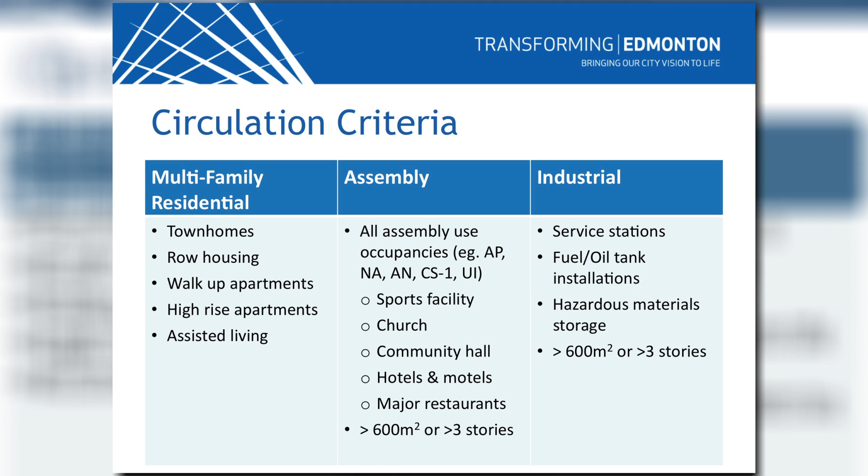As far as assemblies, we will look at normally any major assemblies, sports, church, community halls, hotels, motels, restaurants, or anything over a large size, over 600 meters squared as required by the building code. For industrial facilities, service stations, bulk fuel stations, hazardous materials, or again, anything over 600 meters squared, are some of the type of facilities that is circulated to fire rescue.

Initially, our first comment is to ensure our emergency response and public safety are maintained. We want to make sure that we can get to the facility and that the public is safe, the occupants are safe, and the neighborhood is safe from the proposed development.

Two things we look at are ensuring access to the property, access for emergency services, the public, and a high level of safety for the firefighters. Again, two principal components: emergency access route design and functional water supply. We need utilities to the site, primarily operational water supply to the building.

When our fire prevention officer reviews this submission, we will respond back to the applicant in two forms. One with a condition, and a condition is something that we would require a response to prior to offering support for the proposal. The second one is an advisement.

An advisement is basically information from fire rescue that we do not require response on. It's for additional information for future use or for information that you're going to require prior to your building permit or occupancy of the building.

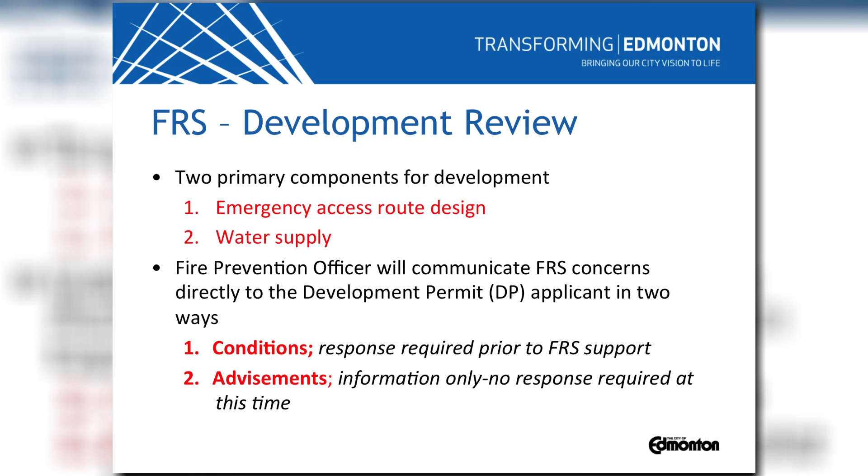When we review fire access routes, we're reviewing the requirements out of the Alberta Building Code 3.2.5.6 and, more importantly, the appendix from that section. Some of the things we look at are the turning facilities. So when we measure from the public thoroughfare to the principal entrance of the building, we're looking at the distance.

If that distance is greater than 90 meters, we would require a turnaround. If the distance is greater than 120 meters, we require a second access to the property. The secondary access should be constructed of a minimum construction of a 3-meter wide concrete path, 6-meter right-of-way.

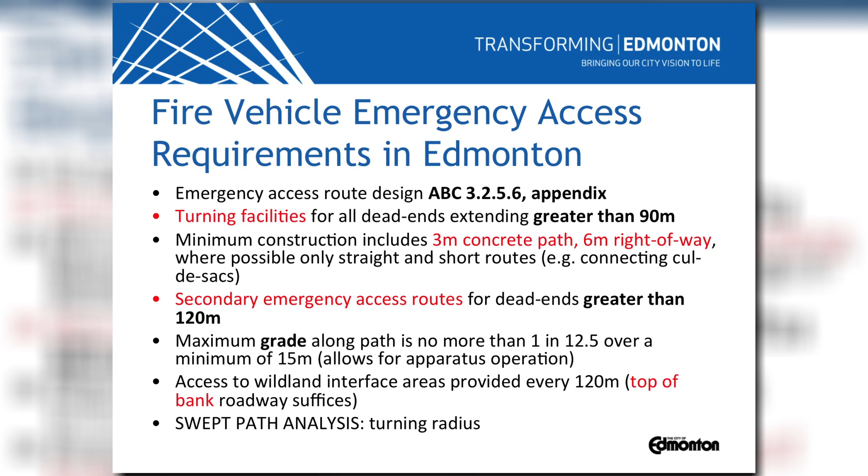3-meter wide concrete path for the wheels of our vehicle to negotiate the access, 6-meter wide for accessibility for us to set up and stage to put out outriggers if necessary for access to a property. The last thing, and probably most important, is the swept path analysis or the turning radius, which we'll discuss further.

The swept path analysis, and if we refer back to 3.2.5.6.1 in the appendix of the building code, it talks about consulting the local fire authority. If you build an access road to 3.2.5.6 with 6-meter wide roads, 12-meter centerline turning radius, etc., that doesn't necessarily mean that a fire or emergency vehicle can access that roadway.

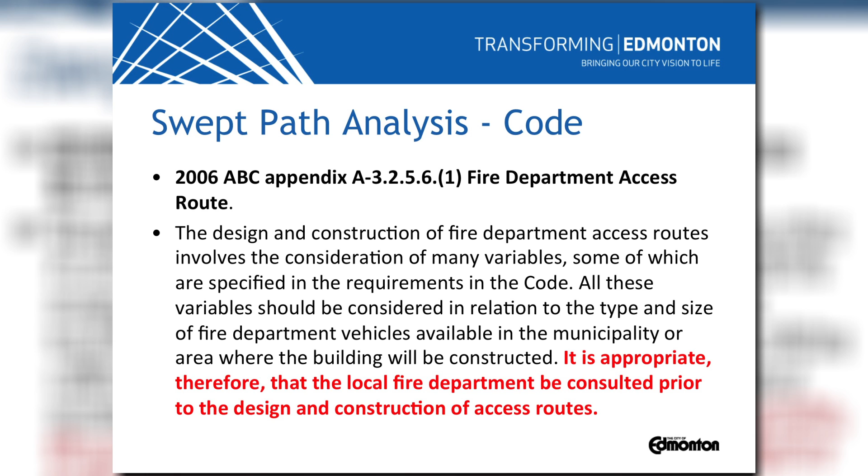In the appendix, it states to consult the local fire authority prior to the design and construction of the access route. What we're finding is that in Edmonton, with the size of our vehicles, quite often the minimum requirements in the code do not allow for access to properties.

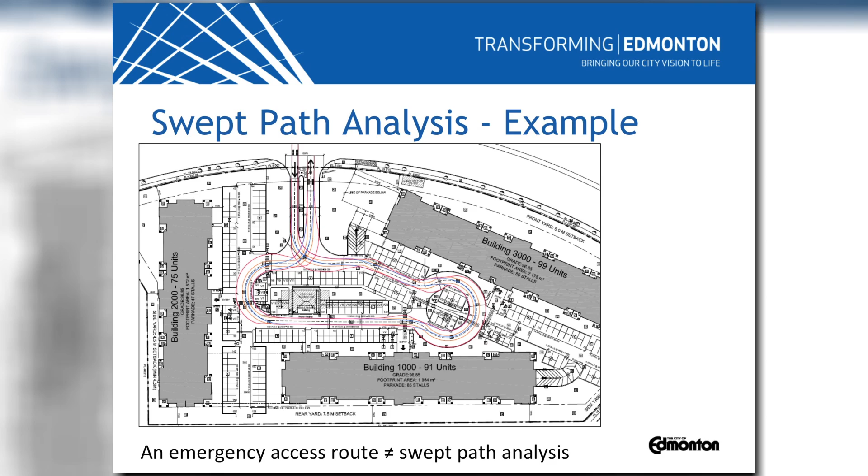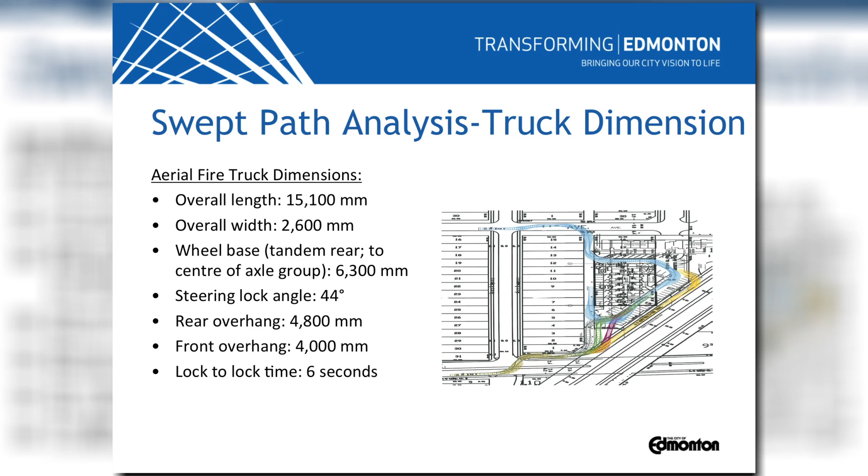When we talk about water supply, the fire code has a STANDATA issued in 2009 that talks specifically about water supplies and access and how the two intermingle and how they provide the necessary components to respond to an emergency in a property. It talks about having the water supply dealt with at the development stage in consultation with other city departments prior to the subdivision approval, and ensuring that not just proposed water supply, but that the water supply is operational and sufficient for firefighting operations.

This STANDATA and all the STANDATAs I refer to are available through Alberta Municipal Affairs. You can Google fire code STANDATAs. In addition to the water supply, Article 5.6.1.4, Access for Firefighting, sets out specific conditions for a fire department's ability to ensure firefighting crews, equipment, apparatus can reach a construction or demolition site to effectively control fire.

So what we're talking about is that we review the design of your access road, the water supply, but it's important to understand that for fire, we require this for construction. So if you need to reference the Fire Code 5.6.1.4, that further explains the requirement during construction rather than just at the end stage. When we apply the fire code in reference to construction sites, it will include single-family residence, multifamily, commercial, any type of occupancy.

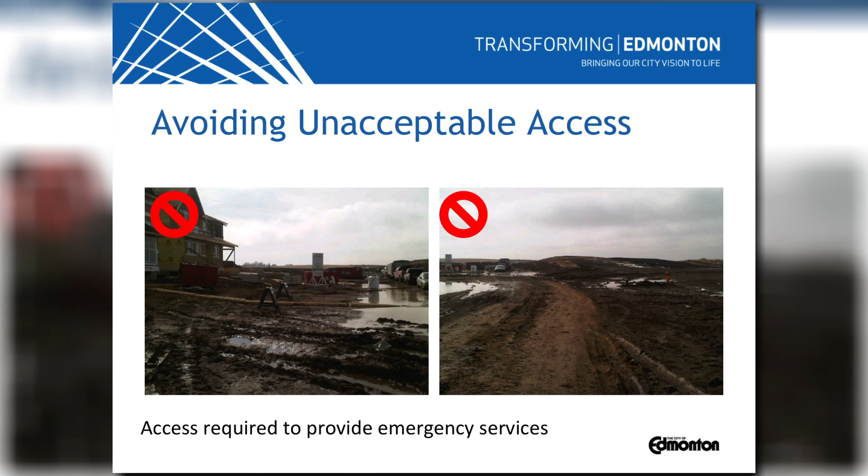Here's an example of a site that has very poor access to the property. So on the left, we have a drawing where we cannot access the building at all. And on the right, there's a diagram of a roadway that is not built to support our vehicles. Our vehicles require a temporary all-weather access road capable of supporting 85,000 pounds.

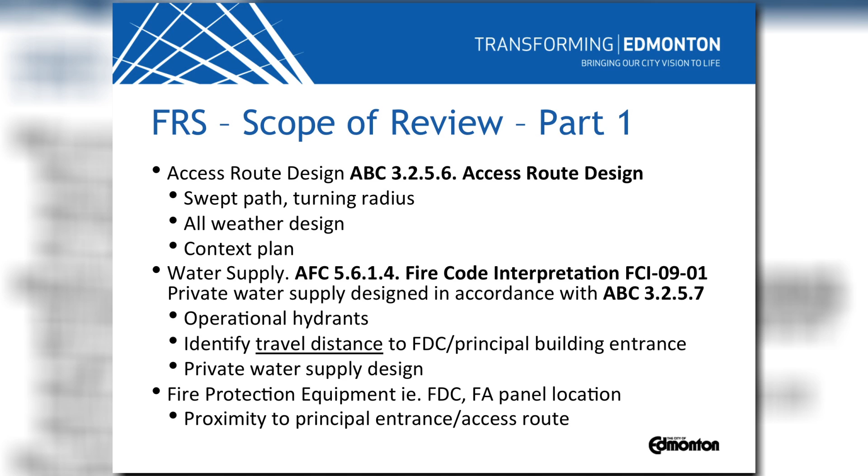As a summary of the access road and water supply, there are two code interpretations that you can use for a reference, but really water supply, access road. We also make comment on fire protection equipment, locations of fire department connections, fire alarm panels in proximity to the principal entrance. Normally this is provided as an advisement for the development. Additional comments are fire safety plan. Fire code requires that you provide a fire safety plan during construction or prior to construction, and furthermore, prior to issuance of a building permit, we're giving prior notification for the requirement for a fire safety plan.

We'll make additional comments on partial occupancy of buildings. The fire code has specific regulations for occupying buildings while construction is underway. We have specific requirements for the protection of adjacent buildings. The fire code has specific guidelines to protect multifamilies, walk-ups, row housing, townhomes, and single-family dwellings during construction.

In addition, during a development permit review, if it's noted that you have a fuel tank storage facility on premises, we will advise that there is a Fire Rescue Services permit to install fuel tanks, and it's just a heads up on that. We will require 3 sets of engineered drawings submitted to our office as well. One of the last comments we'll make is, if it's a high-rise facility, the requirements for the central alarm control facility in a high-rise building.

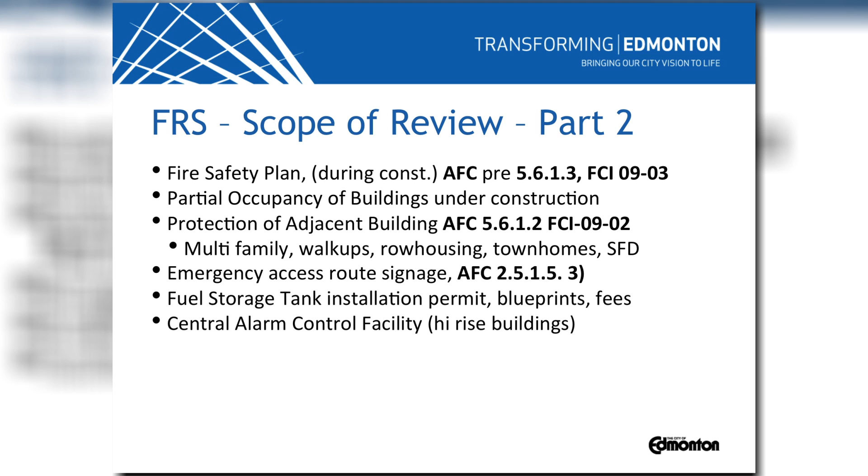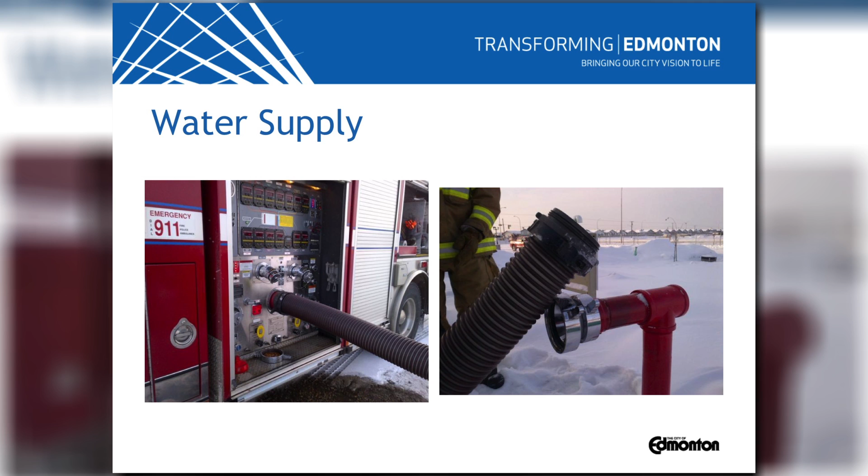2 examples of water supply. This is an example of a private water supply where there were no fire hydrants on the property, and the applicable standards needed for a private water supply. Every water supply that we see is different, but we prefer to be consulted prior, so we have the proper connections so our vehicles can make connection to the water supply.

When we advise on emergency planning, 5.6.1.3 of the Fire Code talks about a site-specific emergency plan that must be available prior to construction of the site. Those fire safety plans get circulated to the Fire Prevention Office for review and possible amendments. These plans are required to be posted on a job site throughout construction. You can reference emergency planning in the Fire Code Standata FCI-09-03.

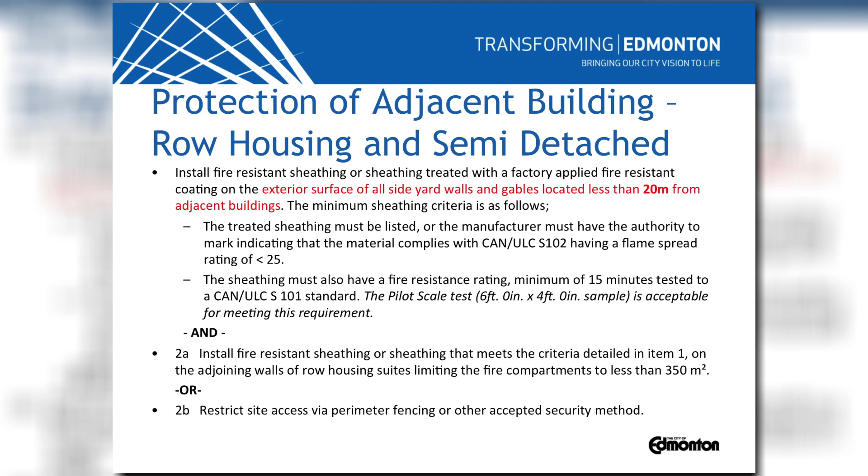As I mentioned earlier, when we discover that there are fuel tank storage systems in a building, Fire Rescue Services will review engineered drawing submissions for the tank installations. These are not covered in a building permit application, but rather specifically addressed through Fire Rescue.

If we're going to take away 3 helpful hints to assist Fire Rescue Services in reviewing the development permit, the most important thing is if you can provide a swept path analysis with the submission. This will greatly assist in evaluating the accessibility of emergency vehicles into the property. The second hint is to consider the availability of an emergency access road in an all-weather design and the availability of water supply for firefighting operations in the early stages of design.

The last helpful hint is implications imposed by the Fire Code that are not addressed specifically in the zoning regulations nor the building code. Fuel tank permits and adjacent property protection are specifically regulated in the Fire Code. We offer advisements at the early stages to assist you with the development of the project.